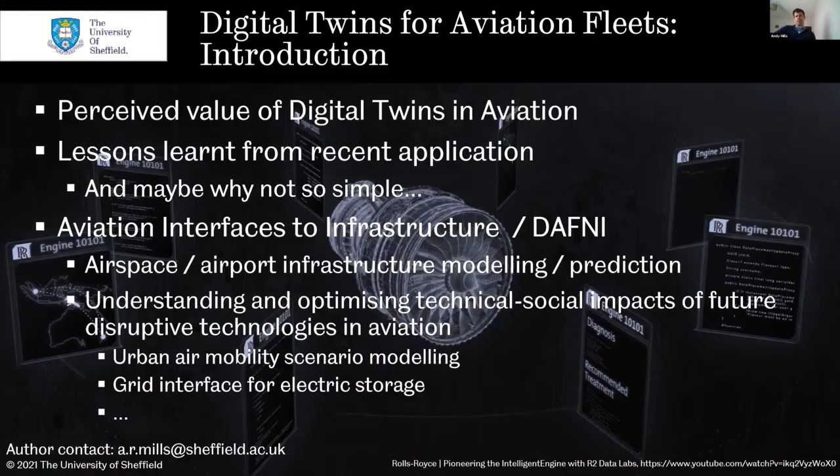So I think Daniel earlier touched upon this. Industry, and particularly marketing departments within industry, love calling any modelling digital twins now. Anything they can show snazzy graphics for, they will call a digital twin, and that's nice for bringing shareholders to the table, I think, but probably not great for doing what the engineers want to do, which is really using models for replacing very expensive development programs.

And none of this is new. Using models in place of real life tests has been around certainly since I've been doing my career, and I'm sure before as well. I remember when working on a Eurofighter Typhoon project back in 2004, the big thing was the certification of lightning strike simulation. So they didn't have to take an aircraft and put it through a very expensive verification program to ensure that it was safe under potential lightning strikes. And that was all the way back in 2004.

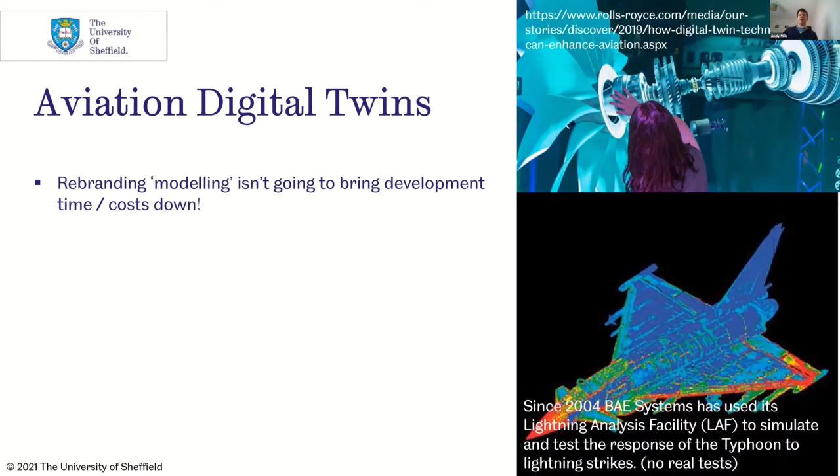Modelling has evolved, but what probably we are on the cusp of is doing better with models plus data, which is really what I think has been emphasized today. We want, in aviation, to have either as-built models or as-operated models. The first being when we manufacture, let's take a gas turbine, hundreds, thousands of components, some of these components very high value, and they need to be integrated into a whole system. Often they're reused and repaired. There are individual tolerances.

And today, an example is that the assembly teams choose from a big bin which turbine blades to put onto an engine in a particular order to try and balance out a mix of the really good ones and the slightly less new blades. Being able to do that in a virtual way would enable you to select the best components for a particular engine that fit together ideally, and understand how those as-built components will actually manufacture in the real world. So it would help us model individual deterioration mechanisms of a particular engine number.

And then we have what I'm calling as-operated models. So this is tracking the performance of an engine as it goes through its life. So what is it actually exposed to in the real world? We design components to be incredibly robust against worst case scenarios. We use the same engine that's got to take off in Dubai at 50-degree heat as we use in much more benign environments.

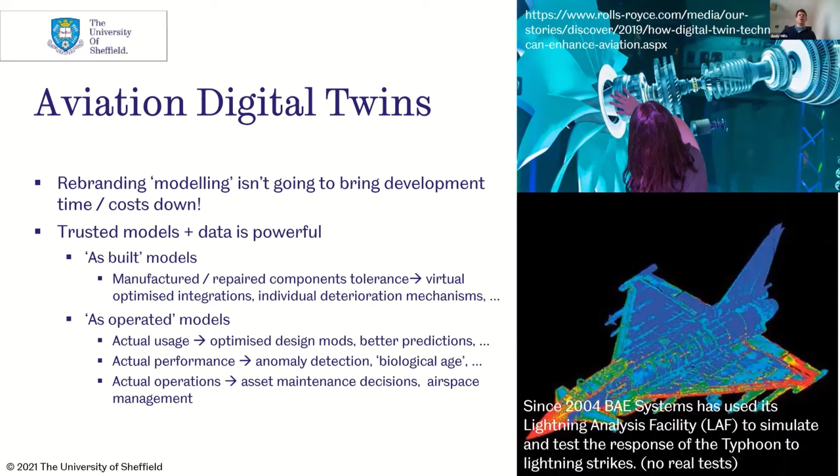Okay, so here's my picture of what goes on today. So remote asset management, as I say, a gas turbine example, applicable to lots of machines that are remotely operating around the world, be it trains, truck fleets, whatever. This particular example, Rolls-Royce have got about 13,000 engines in operation on lots of different aircraft types, flying around, sending very limited data due to technology limits back to ground.

And we want to use that data through data trending and analysis to inform how different airline operators, of which there can be about 800, should use different depots and schedule in their maintenance repairs, understand what they should do, economically optimize the fleet. We're not talking here about safety. The safety is baked into the aircraft. This doesn't require a digital twin to achieve that. We're trying to understand the asset performance.

So what I've tried to illustrate, hopefully you can see my cursor, is an imagined kind of fault that we might see in an engine. We might expect to see much less pronounced than this, but very small amounts of deterioration that occur on gas turbines because they are operated at such extreme temperatures. There's a drive to make them so lightweight, they need the high performance. So we might expect the asset to deteriorate over time. So this is going upwards against decreasing asset performance, and that occurs because the mechanical properties of that system, which are very difficult to observe because they're inside an engine, are changing.

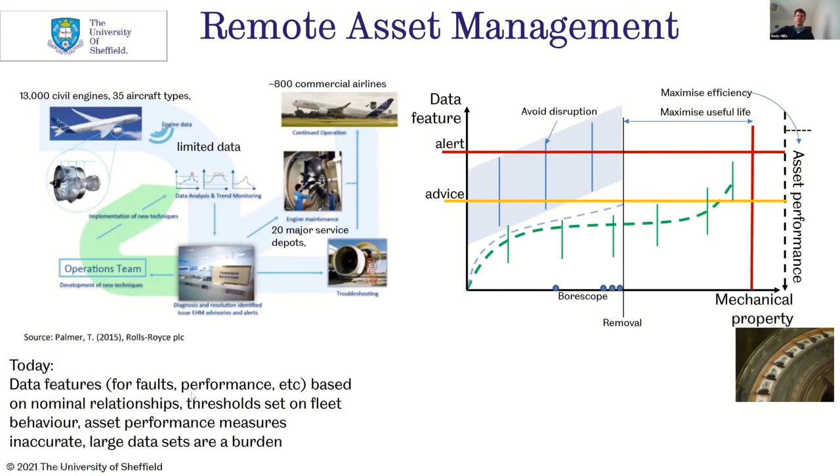So we lose a load of value from what we could get out of this engine, and we lose a load of asset performance that could have been useful. And as we're going through this process, because the data coming back is giving us lots of false indications, we're getting a massive amount of disruption. So all of those things, it's a real burden to handle all this data.

And we want to do a much better job of using models with that data to calculate the true asset performance, to really be able to determine what the mechanical properties are of the system. Infer that from a physics or a data-driven model, and incorporate all that into the asset management and start making adjustments to the system to make it perform better. So really closing the loop on getting data back and actually updating and controlling it.

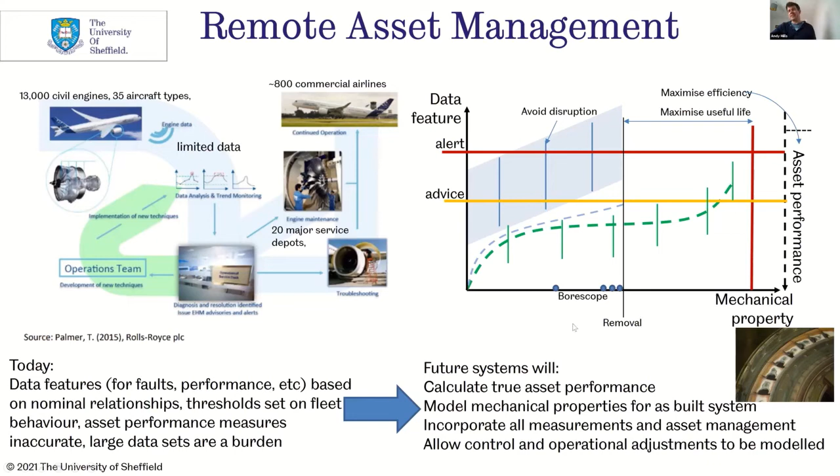So in order to do all of that, we're going to need to have an ability to get that data back. And we're doing that over often legacy infrastructure. Sometimes there are available cellular data links, satellite links, very expensive really to use on the aircraft. And even when they're there, airlines are loath to use those links for engineering data when they could be charging the customer sitting in his seat money to stream videos, etc. So there's always an economic driver to send back as little data as possible.

And we potentially have gigabytes of data, terabytes of data generated by hundreds of sensors streaming at tens, hundreds of kilohertz for vibration and the like. We can't possibly send all of that back. So what we do here is we have a concept of using a novelty detection scheme based upon an onboard digital twin to determine what is the most important data. We don't care if we can model that data well, because that means we already know how the asset is behaving. We want to know what's unusual.

And we prioritize that data, running algorithms on board the engine, and send back short snippets of data to ground, which we triage and try to use the off-board fleet data that we've collected to assess over the entirety of the engines that are operating. Is it truly novel?

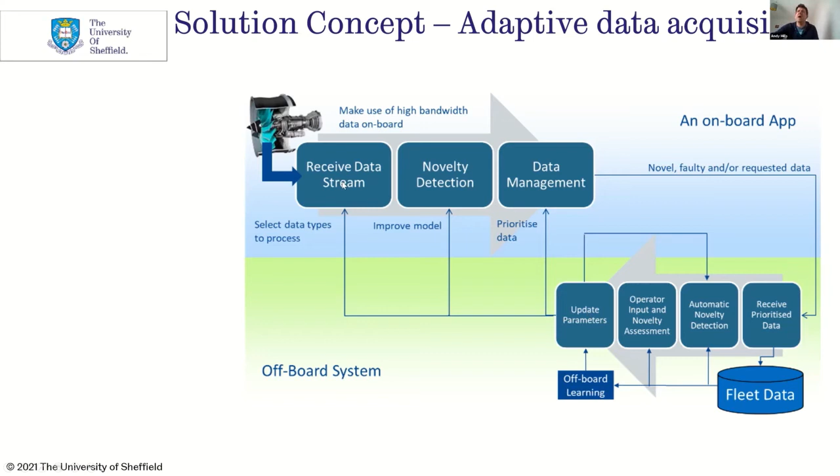Did we send back novel data? Did we just send back stuff that we were uncertain about? And we use that to update our model, send back a parameter set. And we've got to do all this under a set of challenges.

Many of those are around the accuracy of the simulation. We've got to be very accurate over all possible operating regimes, all transients that the engine does through takeoff, through descent, all the different phases over different types of environments. We have lots of variability within the different asset classes.

We have only got a certain amount of onboard processing capability on our engine that we can use, and we're subject to also lots of commercial constraints over security and various regulations, and all of that has got to be trusted. So verifying this system is absolutely key, and that's probably what we spent most of the time doing.

What we've come up with is a solution which uses deep models to capture the very complex behaviour of the engine. We did this after trying to evaluate simple solutions first, and found that deep models were really the way to go. Training those based upon all the data that we're getting across the fleet initially, and then specialising those models to work for a particular asset is the preferred way we want to do that for various reasons, and then selecting the right data to make sure those models are up to date in an active learning type scheme.

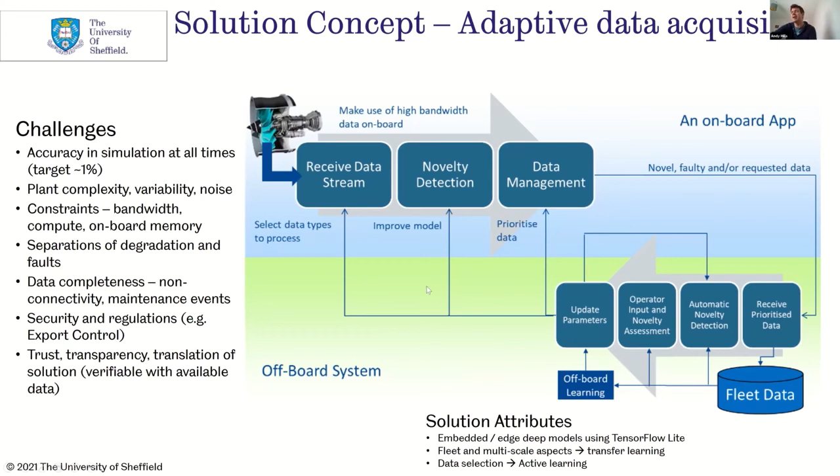And we've taken this conceptual cartoon idea and actually implemented that on real hardware on a real engine, which is pending flight testing at the moment. So we have a convolutional neural network running on our engine, taking data in, making predictions for a particular parameter, and looking at the residuals between those predictions and what we're actually seeing.

When we see something unusual that we think is worth capturing, we acquire that data at very high frequency, and we send that data back to ground, where we use the entirety of the fleet data to allow us to do better characterization of that data that we sent back, and then update the labels that we gave that data. And based on those updated labels, we can update the model and send a new set of weights up to our network. And these networks are incredibly computationally efficient using this TensorFlow Lite toolbox.

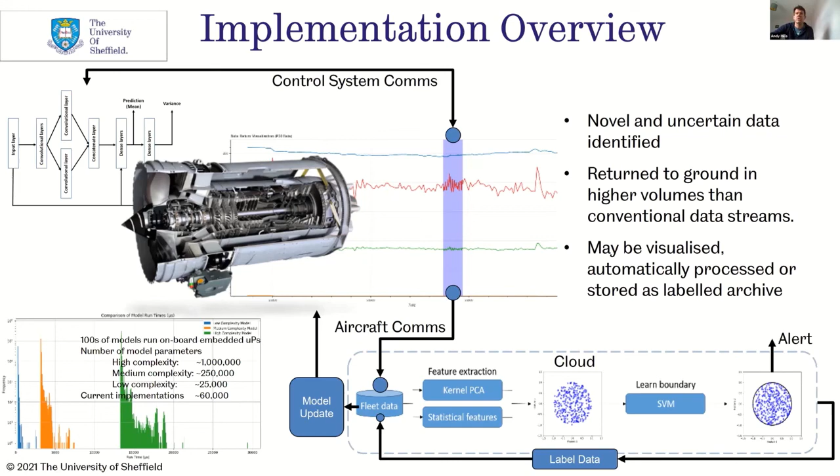We're now able to run hundreds of models for different parameters and different combinations of inputs to give us diagnostic coverage over the engine. So we can pick out novelty in any signal that the engine is producing, and use that to trigger our data acquisition. So we've got a really rich set of data that we can then move forward with, and actually use for all of those things that I talked about at the start, for building our model of how the engine is truly operated in the field.

The key thing I wanted to bring out is these real world constraints that I think we are in the process of overcoming for aviation, to allow us to start building these rich digital twins. We can call it lots of different things, active learning, but I quite like thinking about it as a closed loop on data acquisition, and basing the data you acquire on the needs of the system.

And we're currently taking that forward to be more mature in its technology, TRL6, getting it ready for putting into a real engine project, and we're going to be flying on some flight tests on an engine very similar to the one here on a business jet in the very near future. That's really exciting for us to be actually flying around the world, hopefully in the future on all aircraft with our models.

And none of that would have been possible without the team, particularly people who've worked on this project are Adam Hartwell, Felipe Montana, and Will Jacobs. And they've done a fantastic job, all of them, at getting towards a solution that has been approved to test further. And no definitive papers to go and read yet, but watch this space.